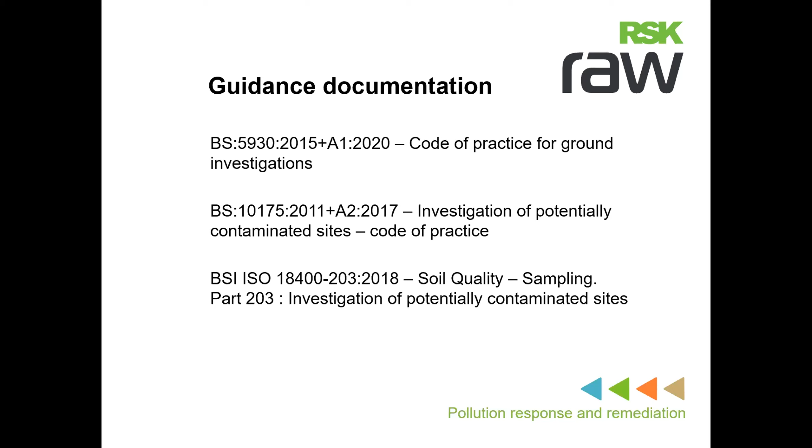So where does it start? Well, it starts at your conceptual site model, the CSM. The conceptual site model is a representation and/or description of the site, incorporating all that is known and anticipated about the site, such as contamination, your geology, pedology, environmental setting. It should identify the pathways by which the current and future receptors could be affected by the contamination. And an important aspect of the conceptual site model is the formation of contamination-related hypotheses.

Gotta love it. Note that its preparation requires some interpretation of the available information and explicit recognition of the uncertainties in that information. The development of a conceptual site model can aid greatly in the understanding of the site and the risks it might present to human and other receptors, as well as the design of future phases of investigation. It also aids in the decision on how investigations and, if required, remediation may be achieved.

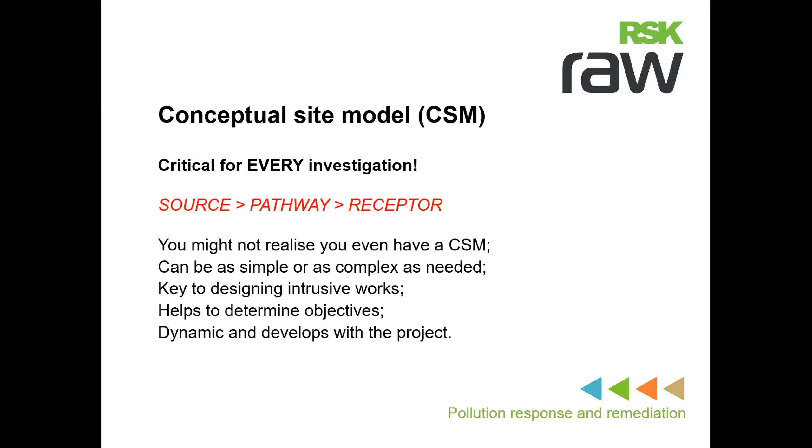Sorry, could everyone mute themselves, please? Yeah, good idea. There's a lot of feedback. Kev Bond. Can we mute Kev? I don't know if I can mute everyone. I think Kev Bond is the one that's giving a little bit of feedback. There we are. Perfect. Thank you.

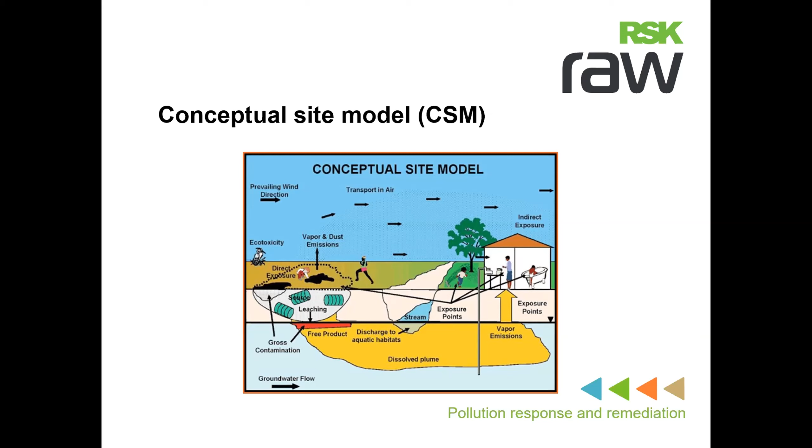Thanks, Kev. So the CSM also allows the contaminated land practitioner to, if required, design a suitable ground investigation, the crux of today's presentation, in order to further assess and/or remediate the identified risks. So, using these CSMs allows you to start designing your drilling investigation by collating the data you've obtained to date and taking other things into consideration, such as the orientation of the spill plume, geology, groundwater depth and flow direction, to name but a few parameters.

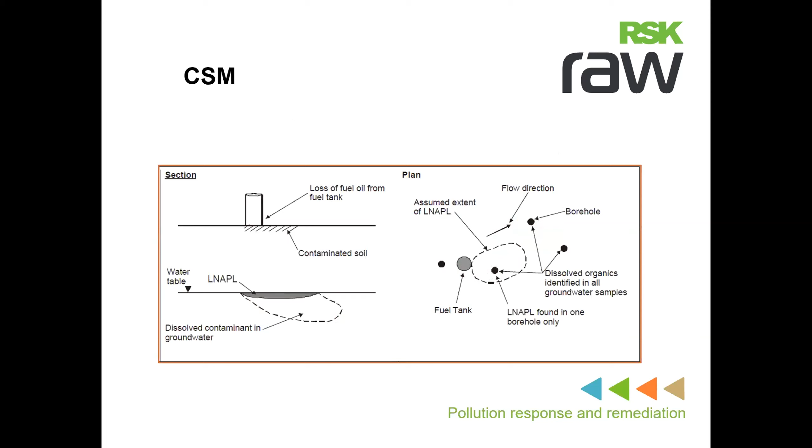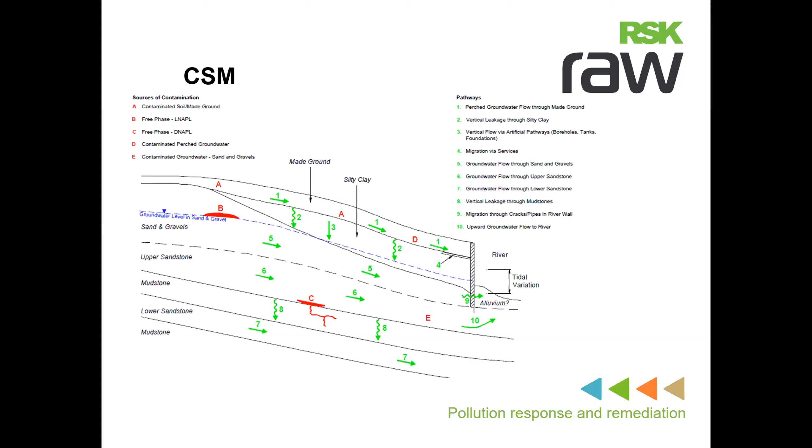So this CSM is from one of my own projects where the ground makeup was particularly complicated. Only through multiple phases of intrusive investigations using different drilling techniques were we able to identify and fully develop this conceptual model. We've identified areas of made ground contamination, 3 different formations, and 2 discrete groundwater bodies. And hopefully this gives you an idea of the amount of information and level of detail that can be obtained by an appropriately designed and implemented drilling investigation. I have to say I'm particularly proud of that one.

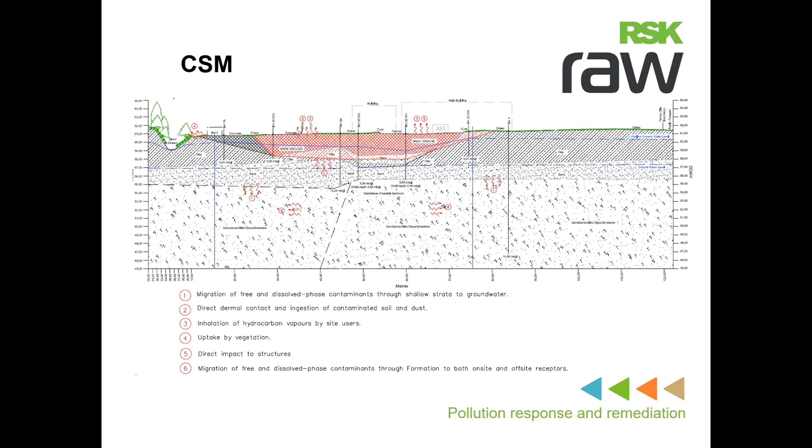So the objectives of your investigations are driven by many factors that need to be assessed on their own merits on each specific project. No one size fits all. One needs to have a clear idea of what you're trying to achieve by undertaking a drilling investigation, and Eric is going to hate me for this, if you even need to undertake one at all. If you need to drill, then you must ensure that by doing so, you're not going to cause a bigger issue than already exists. For example, by drilling a hole to groundwater, are you going to create a pathway by which the contamination, which you're trying to delineate, can then rapidly migrate vertically into that groundwater?

If so, then perhaps it may be better to stop the borehole short of groundwater after bottoming out the contamination in the unsaturated soils, or maybe relocate the borehole outside of the area of your known contamination. If you aren't sure how best to proceed, then please feel free to give me or one of your friendly drilling contractors a call to discuss. The better the planning for a drilling investigation, the less chance there is of a costly mistake being made, and the higher the quality of the data obtained.

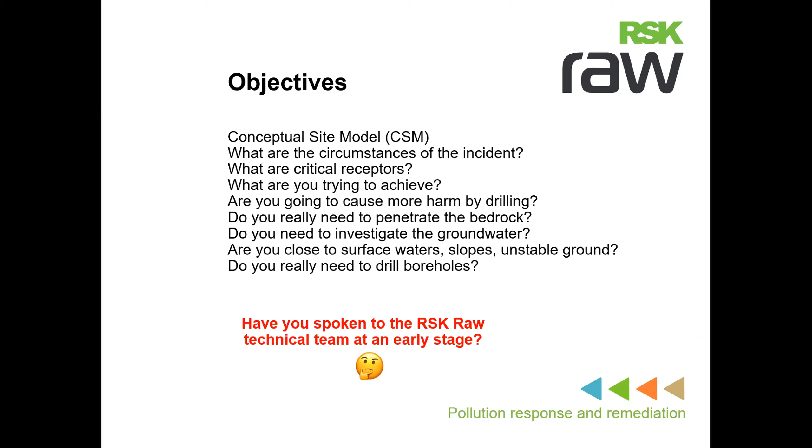So, you decided you need to undertake a drilling investigation. What next? There's lots of considerations that you need to make before you even get to site. You need to determine whether you can safely deploy your selected drilling rig to the site, because wouldn't it be embarrassing to spend all that time and money mobilizing to site only to find that you can't actually get the rig down the side of the building because the access was too narrow and you hadn't measured it?

The following few slides touch on some of the areas that are worth considering and should form part of your pre-start meeting with your preferred drilling contractor in order that you can plan your works properly and safely. When you arrive on site, it's always good to walk the route from where the rig will be dropped off by the transport to where the locations are proposed.

If in doubt about openings, measure them. Simple. If you can find out the dimensions of the specific rig and any equipment, such as compressors that are due to be used on the site, then that can aid in your decision making. But the access limitations you find on site may ultimately determine the final rig used. It's also worth thinking about changes in slope that will cause the rig to tip forward or backwards that could increase the access height required.

For example, the top left-hand photo there, we can see the drilling rig passing through an opening into a building, and the floor level inside the building is lower than the outside level. As it runs in, it tips the rig forward and it brings the mast fairly close up to the overhead lintel. Fortunately, we were prepared for that. It was expected and all planned, and there was no damage caused, but it was still a very close run thing.

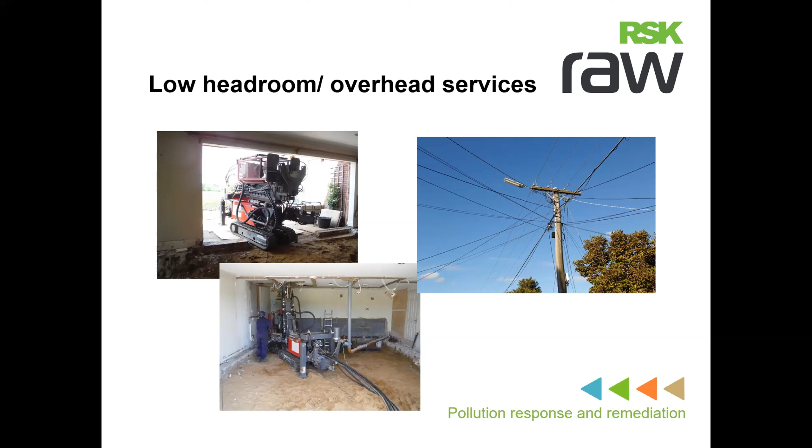Sometimes it's not just the rig you need to consider, it is the lorry that it's delivered on. Is the gateway wide enough? Look at the road leading up to the gateway. Is it a sharp turn into the site, making access more difficult, or a straight shot through? There might be enough room for the rig, but what about the telehandler that is used to move the equipment around?

Is a narrow country lane going to be blocked during the delivery and or operation of the rig and equipment? Do you need a banksman or traffic control measures to ensure the safety of the road users as well as staff and contractors? All things that you should be looking at in your site visit.

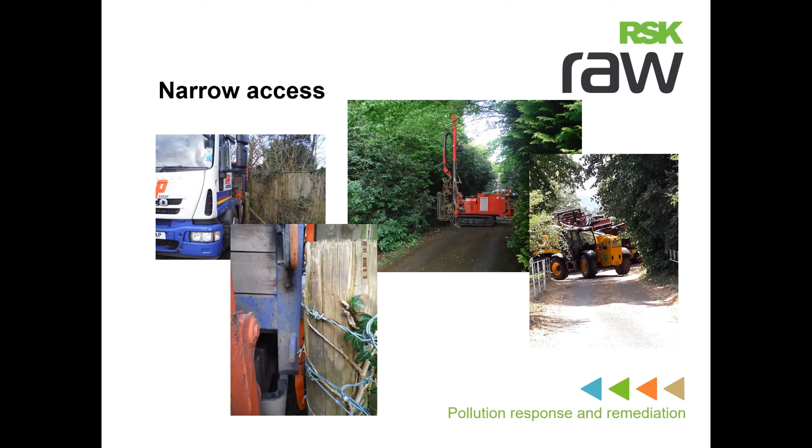Drilling rigs can be very heavy. Despite their tracks, they can cause damage to soft or fragile ground. And bear in mind any changes in the weather, such as rainfall that can turn a grassy field into a bog, or hot weather softening tarmac that can then be more easily damaged. What protection measures can be utilised? Well, there are things such as track mats that you can see in the bottom right image that are very useful, amongst many other solutions.

However, ground protection can be very expensive, both in hire costs and in labour to deploy and recover at the end of the work. So please ensure that you allow enough in your costs for doing so. We quite often see plyboard used for protection, and in my opinion, it's not ideal as it becomes slippery when wet and muddy and can warp, leading to the creation of trip hazards, irrespective of the ecological question mark of its subsequent disposal at the end of the work.

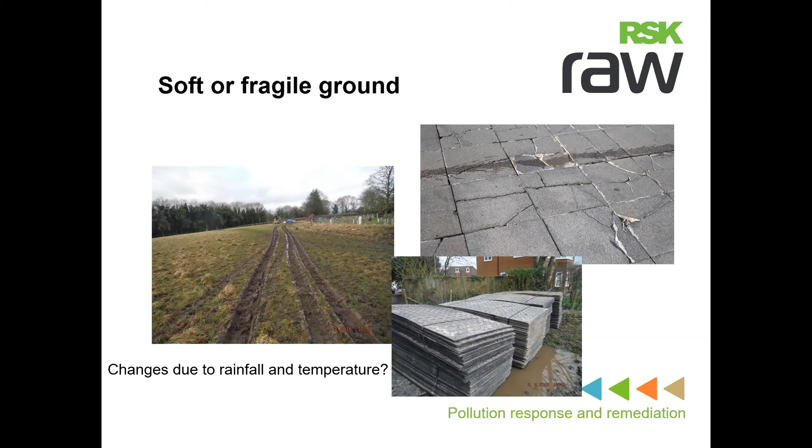You may need to identify an easily accessible and suitable staging area with your client or landowner, maybe somewhere slightly remote from the drilling area. Ensure that the area is fenced and appropriately signed to prevent unauthorized access and allow enough room to work safely. The size of the staging area will be dependent upon many factors, including quantity of installation materials, as you see in the top left, and any additional plant and equipment needed for the work.

Rotary drilling, for example, uses air compressors and water bowsers, as well as various sizes and quantities of containers for storage of and recovery of the flushing fluids. Telehandlers are often used for moving large pieces of drilling equipment around a site, but they need somewhere to be parked safely when not used. Consideration also needs to be given to the location of a skip or stockpile for soil arising.

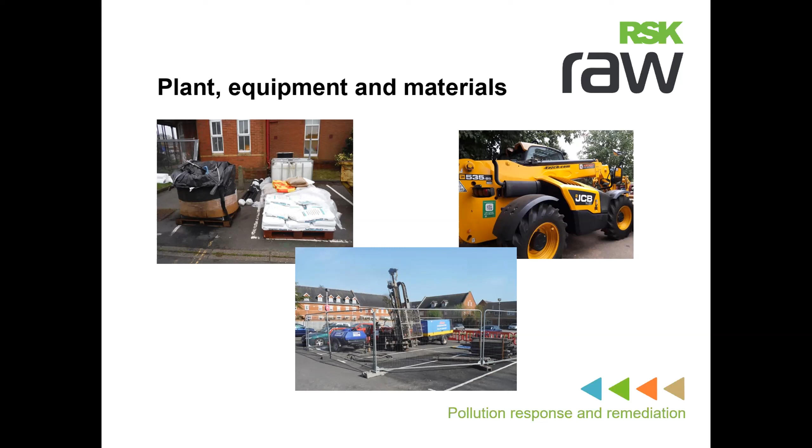I'm sure everyone's familiar with buried services. Allow enough time to order plans from a relevant service provider or use a dedicated service plan provider and clearance contractor. Service strikes are one of the biggest hazards faced during an intrusive investigation. A service strike could be fatal to the operatives and anyone walking nearby, or at the very least, very expensive for the company in repair costs, fines, increased insurance premiums, and bad publicity.

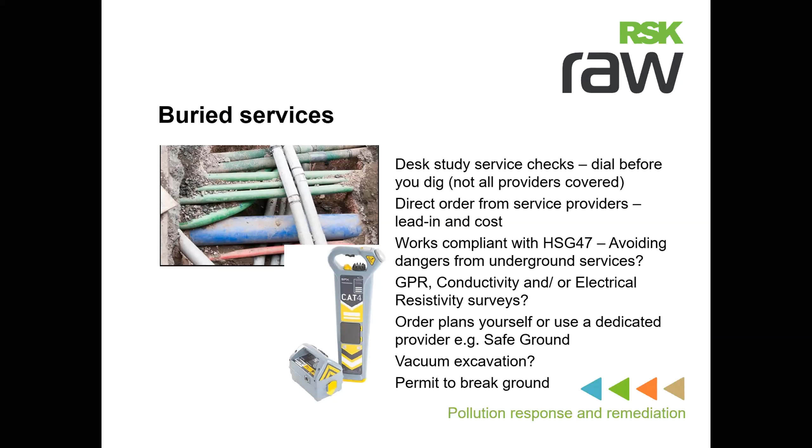Waste is going to be generated during the course of drilling works, and you must consider what to do with it before you arrive on site. As I previously mentioned, a suitable staging area should be agreed for skips or waste drums with adequate fencing, because there is nothing more frustrating than arriving on site to find your skip full of people's sofas and fridge freezers. Waste should be segregated, as usual, into appropriate streams and disposed of via appropriately licensed waste treatment facilities under correct duty of care documentation.

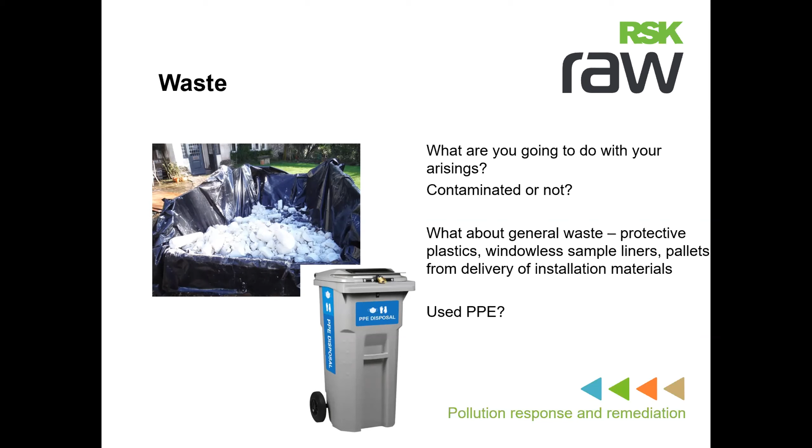Determining the likely conditions will be part of your CSM, and hopefully you have already completed this at desk study stage. If not, you must do this before you even consider putting a rig on site. There are many different sources of information, and you should utilize as many as is required to adequately inform your investigation plans. No one size fits all. At the very least, I would suggest a geology search, a hydrogeology search, and review of publicly available local borehole records, because the information gleaned from these sources will likely have the biggest impact on your proposed drilling works, the type of drilling rig, and the methodology that you use.

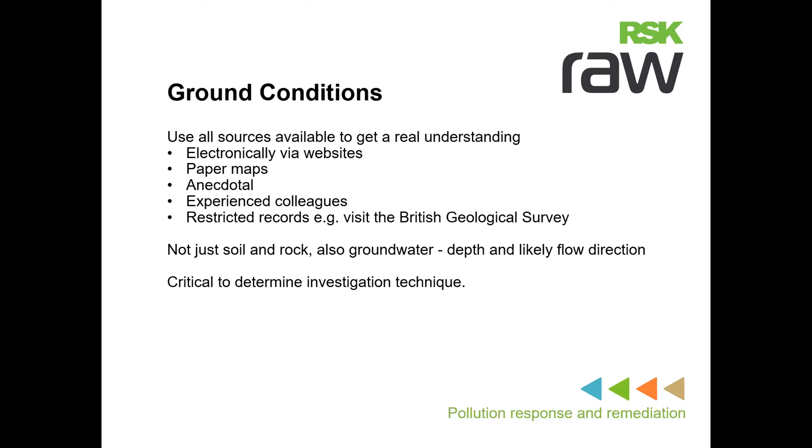Now, drilling rigs. I've grouped them into three main groups, and I'll just touch on them very briefly here. So we've got mini dynamic sampling, cable percussive, which are also known as shell and auger, and rotary or multifunction rigs. And I'll just touch on these briefly over the next few slides, and Eric will discuss them in a bit more detail later.

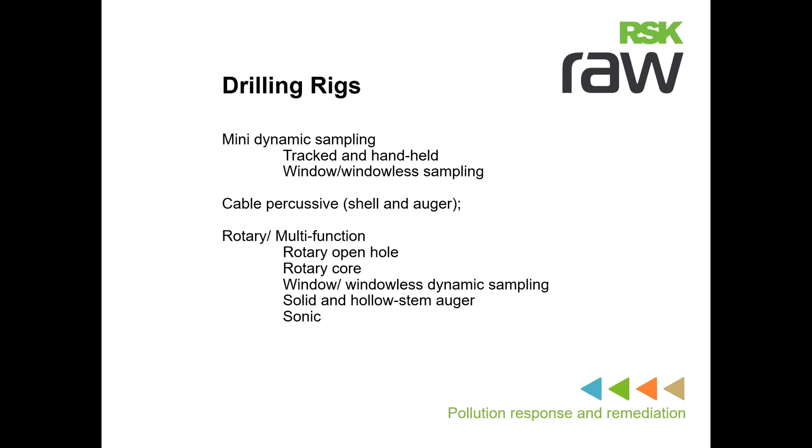Mini dynamic sampling rigs. These can be handheld or tracked and generally undertake window or windowless sampling. There are discrete differences, but I won't go into them here. In the industry, they're generally known as window sampling rigs. They're great for shallow investigations in soils and unconsolidated deposits to depths of about 10 meters, and they're great for soil logging and sampling. They can access relatively restricted areas, including indoors, and are at the cheaper end of the scale for drilling works. They do, however, struggle with consolidated deposits and can be very noisy. The weight that is repetitively dropped in order to drive the sample tube into the ground does drive some people to distraction.

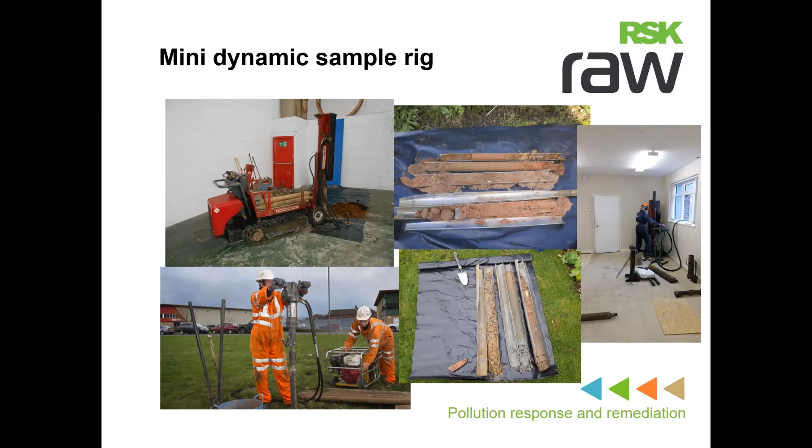Cable percussive, also known as shell and auger. These rigs are usually towed behind a 4x4 and maneuvered into position. They're great for deep investigations of soils and unconsolidated deposits to depths in excess of 30 meters. They're great for soil logging and sampling and are accurate for identifying groundwater strike. They do struggle with rock, but can chisel away slowly, and they do require a reasonable amount of working space.

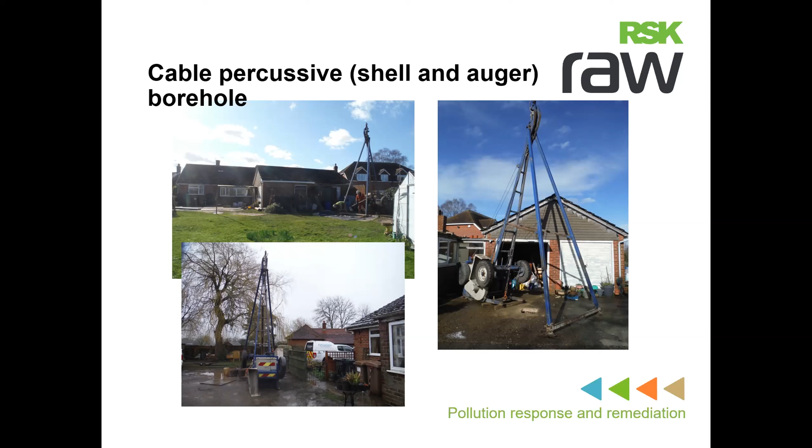So rotary and multifunction rigs are the do-it-all of the drilling world. They're self-propelled, but they are very heavy. They're highly versatile and can often undertake multiple different drilling techniques, quite often on the same borehole. They're great for fast, shallow and deep investigations in soils, unconsolidated deposits, and rock to depths in excess of 100 meters, depending on the rig. They're variable for soil logging, as it depends on the technique being used and the amount and type of arisings that are generated.

Identifying groundwater strike can be difficult, and you need to ensure your desk study information is as robust as possible to aid you in this regard. They do require a reasonable amount of working space, and with your back turned, can create more mess than any child could hope to in the same time. They also have some of the highest mobilization and day rates in the rig sector.

All of the above rigs will create noise, vibration, and dust. Some are worse than others. Adequate risk assessments must always be undertaken, and appropriate PPE and control measures must be implemented.

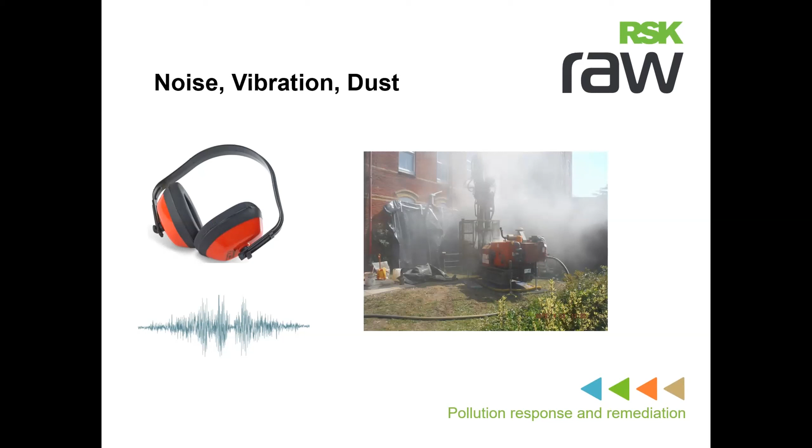Related to the previous slide, dust generation from rotary rigs can be controlled. They utilize different flush mediums to assist and speed up the drilling process, and changing from an air flush to a mist or a water polymer flush can reduce the amount of dust generated. However, they do bring their own challenges.

Flush mediums generally require larger work areas due to the additional equipment required and the potential mess that can be created. Using a flush can mobilize gases or VOCs, create aerosols, and potentially force the contamination that you're investigating into previously uncontaminated strata. Have I mentioned the mess before? Do not underestimate the amount of mess that can be created in an incredibly short period of time if adequate containment measures have not been implemented and/or the flush has not been controlled properly.

Casing. During drilling, usually in the top sections of the borehole, casing can be used to prevent collapse of any loose material back into the recently dug borehole. Casing can also be used to separate different formations and can be sacrificed and left in situ. Casing is a larger diameter than the bore being drilled, is heavy, and on occasion can be incredibly difficult to remove from the ground. However, without it, many boreholes wouldn't even make it past the first couple of meters. Whilst it's a frustration, it's very, very useful.

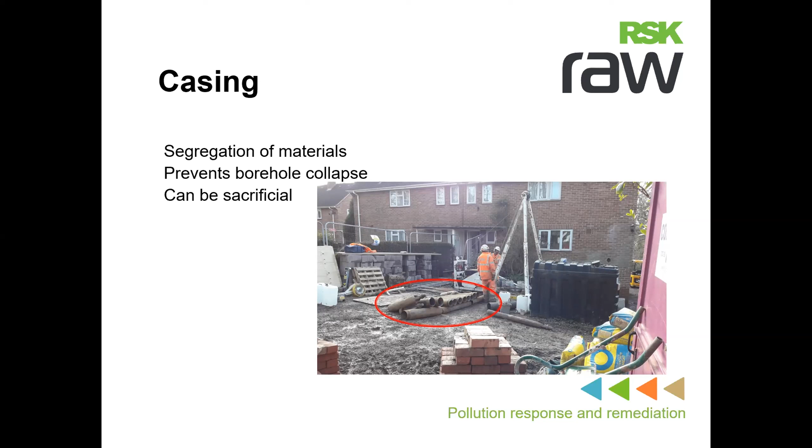On occasion, we need to drill through contaminated materials and into clean substrata or groundwater. And that's where environmental drilling comes into its own. Environmental drilling involves the drilling of a large bore to the initial required depth, i.e. to the base of the contamination. This large diameter bore is then grouted. A small diameter bore is then utilized to drill through the grout and take the borehole to the final required depth.

This methodology is often used when changing drilling technique, passing from one formation to another, particularly with different permeabilities of the formations, or passing from contaminated materials into uncontaminated materials. It is used to prevent cross-contamination between formations and/or groundwater bodies. This is a highly specialized area of drilling and incredibly easy to get wrong. The engineer must have a good understanding of the geology and hydrogeology, as well as the contaminant being investigated, as well as the objectives of the investigation.

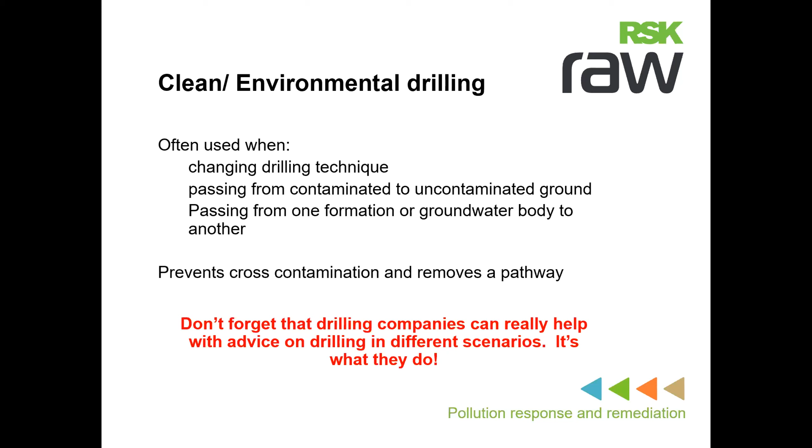So soil logging and sampling. This is a mandatory element of drilling works. You need to gather the data from the arisings in order to provide a record of the ground conditions encountered and to feed that into your CSM and ultimately your risk assessment. Soils, as always, should be logged to BS 5930. And timescales and costs aside, there is no such thing as too many samples. I'm not saying schedule them all for analysis, although some of our labs would be very grateful for that. Log them, headspace them, record them. However, too few samples and you will not be able to complete an adequate assessment of the contamination or risk.

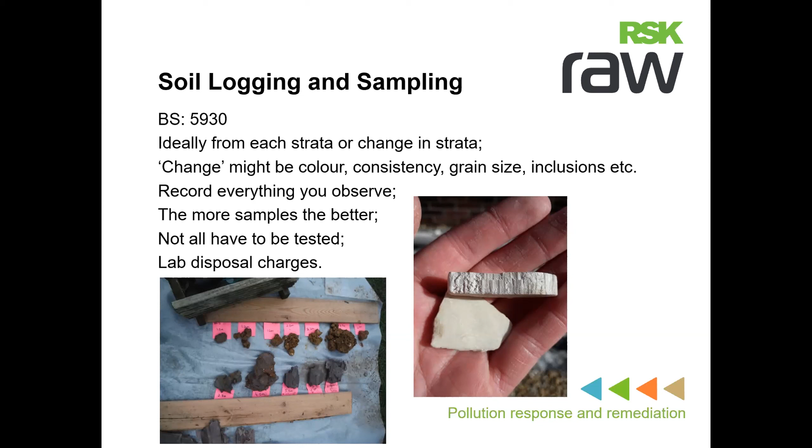Probably the most critical part of the investigation. The design of these installations will be highly dependent on the geology and hydrogeology encountered during the drilling, as well as what you're trying to measure or monitor. What's your objectives? What are you trying to achieve? Does the installation need to be a metal or plastic piezo? Should it be a 50 mil well screen for groundwater monitoring? Oh, sorry. Or 110 mil plus for remediation. Depending on the contamination or the installation details, are welded fittings required by HDPE, or is PVC preferable? Lots and lots of decisions to be made around the installations, notwithstanding the design of them.

The use of a filter sock may be necessary to prevent fine sediments entering the borehole and silting it up, but it may then hamper product recovery and significantly impact validation. I'll repeat it several times through here. There is no one standard installation. It's bespoke to every single location.

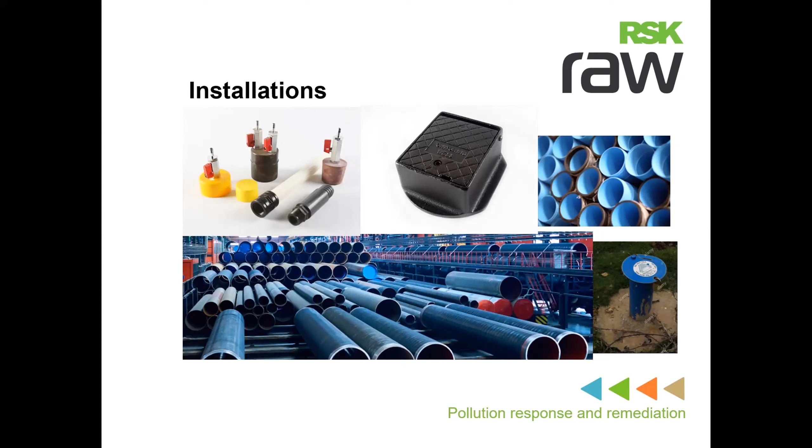Another question to ask is what headworks are required? A flush fit cover to prevent a trip hazard, a raised cover so the well can be found amongst waist-high meadow grass in the middle of the field in the summer, with an inspection chamber within an inspection chamber to aid with the monitoring and remediation equipment. Each option is site specific and consideration should be given to security, so lockable covers if possible, and longevity. As if groundwater remediation and validation is required, these monitoring points will be in place for a number of years.

Upon installation, it is ideal if you can develop the well immediately to remove as much of the drilling fines and flush water as you can to prevent silting up.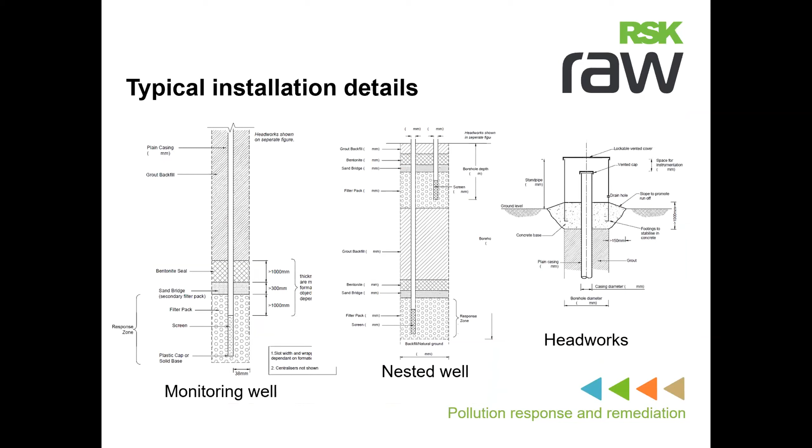So, in summary, never complete a standard installation. Every installation must be site and situation specific. Never link or install a well across strata, as you may create a pathway that could allow rapid migration of contamination into previously uncontaminated strata or groundwater.

If you need assistance, then the Environment Agency have produced a guidance document for the design and installation of monitoring wells. And if you're in any doubt about anything at all, then please ask an experienced contaminated land practitioner or drilling contractor for further advice. I can't stress that enough. Nobody's expected to know everything.

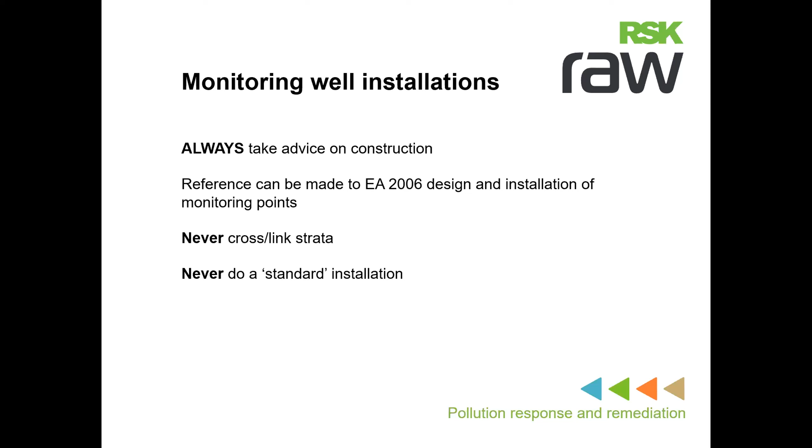So you've got your well in. The well should have been developed. Best practice is also to level in the boreholes or the wells, either to an ordnance datum or to an arbitrary datum for the site. If it's applicable to your investigations and your end objectives, then you can complete a VOC survey of the wells before undertaking your groundwater monitoring.

Always dip and record the depth of LNAPL, to groundwater, to DNAPL and the depth of the base using an interface probe, and always record the measuring point from where you're measuring from. And use that point consistently from visit to visit so that you've got comparable results. You're aiming for representative samples of in situ conditions, and a multi-parameter probe can definitely help with that.

So calculate your purge volumes, usually around 3 well volumes, and then record your purge waters to ensure the accuracy of your purging. Depending on your goals for the work, you may not always need to purge. For example, if you record very high VOCs or free-phase product, that may be sufficient for you to determine there is a risk that further work is required.

There are lots of different sampling equipment and techniques, and the choice will depend on many factors, but particularly the contaminant you're investigating and the recharge rate of the groundwater. Low flow sampling lends itself to most situations as it minimizes the volume of liquids purged that will then subsequently require disposal, and it suffers from minimal loss of VOCs from the sample.

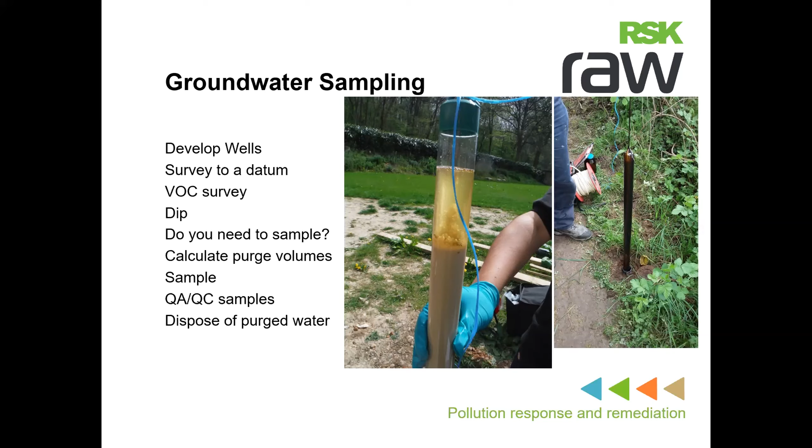So, record keeping of the findings of your drilling works and installation details are incredibly important and will form a very big part of your CSM, risk assessment and your final reports, with the data entered and stored predominantly in these borehole logs. These logs provide a large amount of information in a very small space and allow a really good pictorial cross-section of the geology encountered, installation details of your monitoring well, sampling and screening data that you collected during the course of the work, and any other relevant information you want to add on there.

Borehole logs are often requested by regulators and can also be submitted to the British Geological Survey for public record. So do make sure they're good. By comparing borehole logs from across a site, you can often identify the same or similar formations and strata and delineate the discrete bands of contamination. Some specialist borehole logging programs will also allow you to create a 3D image of the site based on the logs.

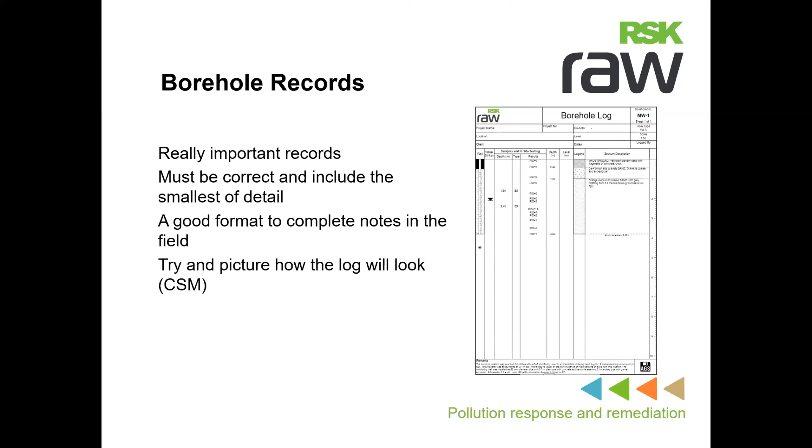So, you've completed your work. You've validated the site. What do you do with the boreholes? If they could be reasonably repurposed for appropriate uses, then that is acceptable. However, improperly abandoned boreholes and wells can provide preferential pathways for groundwater or contaminant movement. This may result in the contamination of groundwater, the mixing of groundwaters of variable quality from different aquifers, or contribute to the loss of aquifer yield and water pressure as the groundwater flows out of the system. This can go on and threaten the availability and quality of the groundwater resources for other users.

Despite seeming a very easy thing to do, the proper decommissioning of a borehole often requires a skill and equipment that only a specialist drilling contractor has. So do talk to your drilling contractors about borehole decommissioning, particularly the emplacement of impermeable materials into the base of the borehole to ensure that there's no bridging of that material as it's in place.

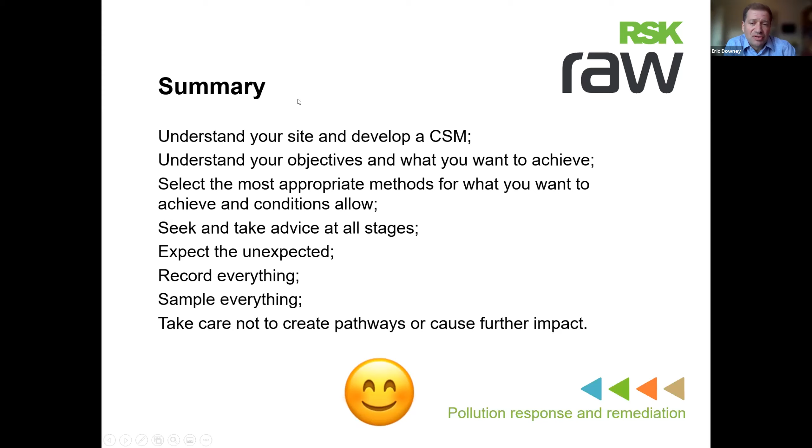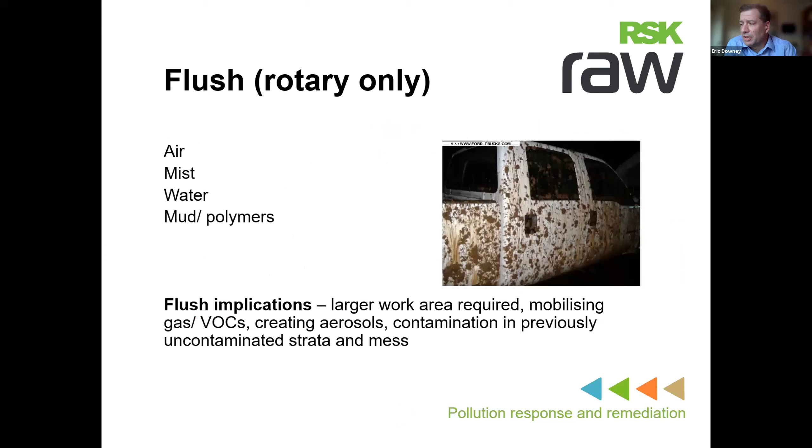That one in particular is a hollow stem auger that was used in very loose, almost blowing sands. As you auger down, the arisings come up the outside. You can log them, but it's quite difficult to know exactly where they're from. That's what I was going to say myself. So I prefer not to. I think I probably had it once on site and it was specified by somebody else, but yeah, it's very hard to get a discrete sample. It's great if you're just putting a hole down, but I would not specify that for any contamination because you don't know quite where that contamination or that material has come from.

So I think no, indeed. They're quite useful for installing boreholes in those kind of loose ground conditions. They essentially self-case as they go. The challenge then is removing the drill string without pulling the well installation up and out with it, particularly with blowing sands.

Yeah. Sam Granger has said, as soon as I hear rotary and car parks, I always pack a few extra large dust sheets to cover over cars. Yes. A very cheap and cheerful thing is some Harris fencing and some visqueen on the back of that. That seems to work quite well, and that's quite effective, certainly. And yeah, chalk is the worst thing ever if you're rotary drilling in a chalk area, because that chalk dust gets everywhere. We do most of our drilling in the southeast, so we come across chalk an awful lot, and it's challenging.

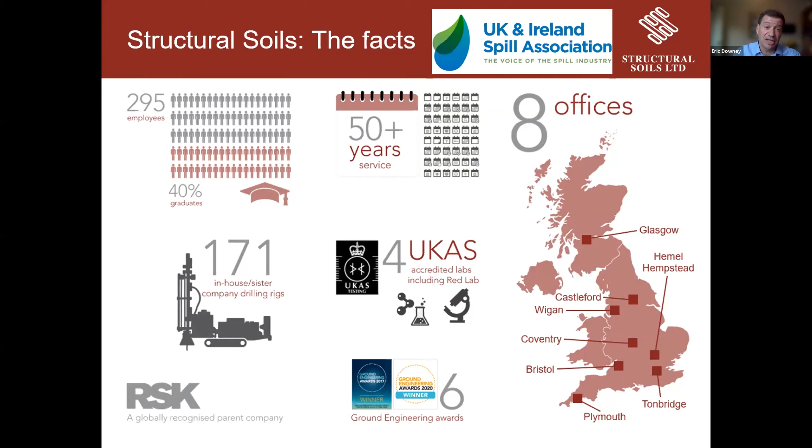I'm just going to very briefly give you this one slide of Structural Soils. We are nationwide. We're part of the RSK group, a bit like RAW, and we have a number of offices, a number of bases of operation, and we have a huge number of rigs within our group. So hopefully we can meet your needs, requirements, and timescales, which is probably more to the point than any of the other above. I won't talk about who we work for, but we do contaminated land. We work for a number of different people.

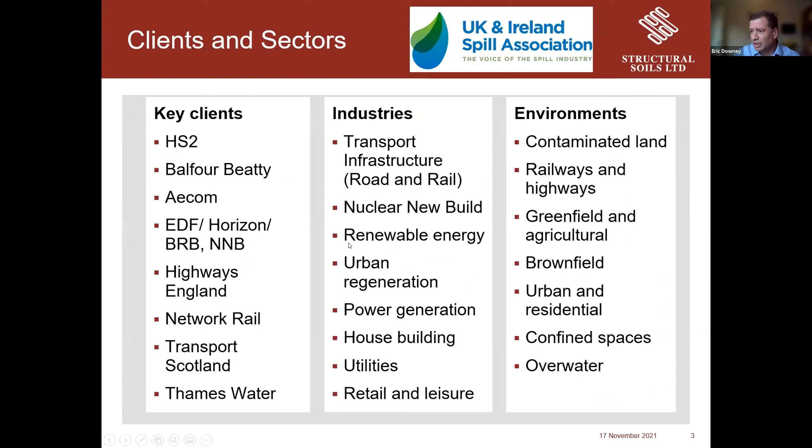So Rory has touched on investigation techniques, and I don't really want to teach you to suck eggs. However, I just want to go into a little bit more detail than Rory gave about the cable percussion drilling. This is typically for soft ground materials, so we're talking sands, gravels, clays. It's been around since Roman times. Obviously, the Romans didn't quite have a petrol or diesel engine on the end, but they put in piles using this sort of A-frame technique. So it's been around a long time.

It's very effective, it can get through a number of different ground conditions, and it's relatively maneuverable. I will talk about some limited access stuff in a second. We can get down to 80 odd meters if you're lucky in the right ground conditions. But yeah, it's very, very effective. And like Rory was saying, depending on your site, you may want to get other rigs in, different types of rigs to give a variety of different techniques on that same site.

But what I do want to talk about very briefly is one of the mandatory safety features. The British Drilling Association has now made it mandatory that all cable percussion rigs have what's known as a whip bar on it. And if any of you come across a driller that's not using the whip bar, you can get his or her respect straight away by saying, please, can you put your whip bar on? And they will know that you know what you're talking about.

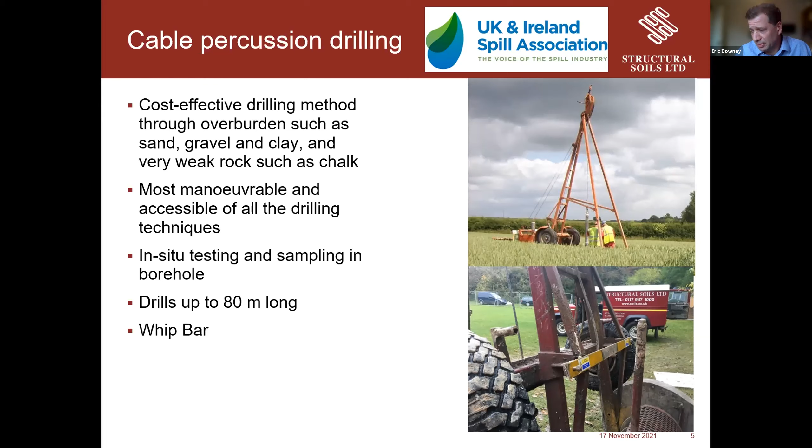So Rory did actually have a picture of a cut down rig in someone's back garden. This is another picture of a cut down rig working in a basement of the old Colston Hall in Bristol, which is now called the Beacon. Yeah, it's all about communication, and Rory did touch on this. It's very important that you talk to your drilling contractor about where you want the borehole, and the limiting factors. And he also said about measuring the height.

The more height we've got, the larger the apex can be, the bigger the rig we can set up, the faster we can drill. The faster we can drill, the faster we're out the way, the cheaper it is for your client or you. So the more space we have, the easier it is for us to drill, the faster we can do the job.

This job on the left-hand side was a job I tendered and project managed, and I asked the client, what's the access like? He told me I want you working on a bridge deck, and it's about 3 meters wide. I said, absolutely fantastic, thank you very much. We came with a full-size rig. However, what I didn't ask was, where exactly do you want that borehole within the bridge deck? I didn't ask the question, and he didn't tell me the answer, but he wanted it off center.

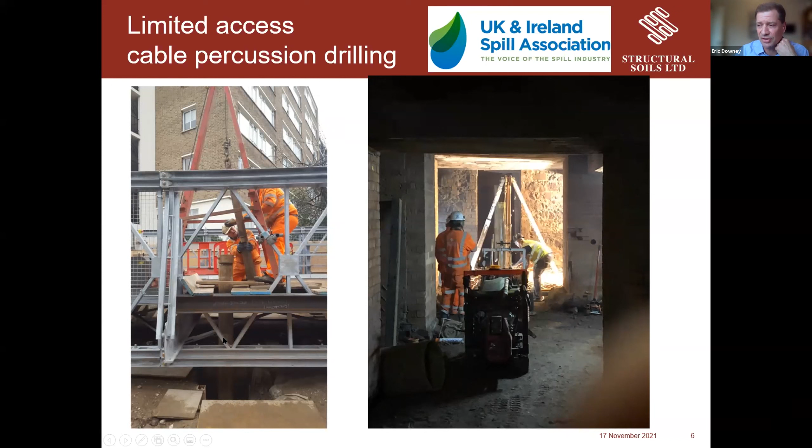So this was a site in London, and we had to mobilize a second rig to make sure that we got into the location that he wanted. So again, communication is vital in all of the things that we do. It was just not asking the right question at the right time. So that cost us money, unfortunately.

This picture is obviously a small rotary rig. It's a Geo 205. It's a fantastic workhorse of the ground investigation industry. Most of our competitors have them. They're relatively small, relatively powerful, and can go into lots of different environments.

One of the benefits of this type of drilling rig, it's got two drilling heads. One is a dynamic sampling hammer, which will just push through the drilling tubes, which are over here. Those are like casing, and you've got the rotary. Well, these aren't the right ones. These are the rotary barrels, but you've got a sort of casing and sort of vessel that will be hit with basically a big hammer, and that will go through sandy clay sands,

but it needs to have a cohesive element to it. And if it's pure sand or pure gravels, it will struggle, and that's when we need our cable percussion rig. But if there is a little bit of a clay content in there, we should be able to use the dynamic sampling head, and then when we've got through what we class as the overburden, the sands, gravels and clays, we can then flip over to the rotary head and then use these rotary core barrels and go through using that.

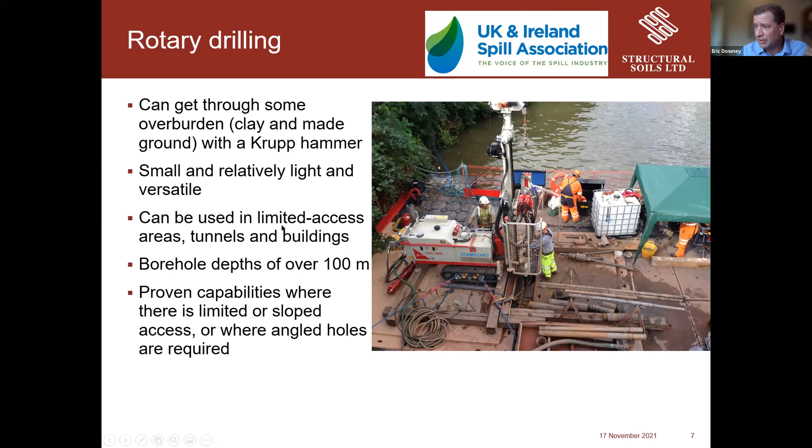So this is one of the SPT hammers, and this will give us strength indication through the site as well. So yeah, that's the small rotary job. We can get a rotary job into some confined spaces.

Again, some of you guys may have spills within buildings. You may need to investigate inside. It depends on how deep the spill has gone and the ground conditions, but we can use rotary inside the buildings. Obviously, you just need to be careful of the fumes. We need to make sure that we look at the fumes and the amount of air that's coming through here. We don't want to pollute the atmosphere.

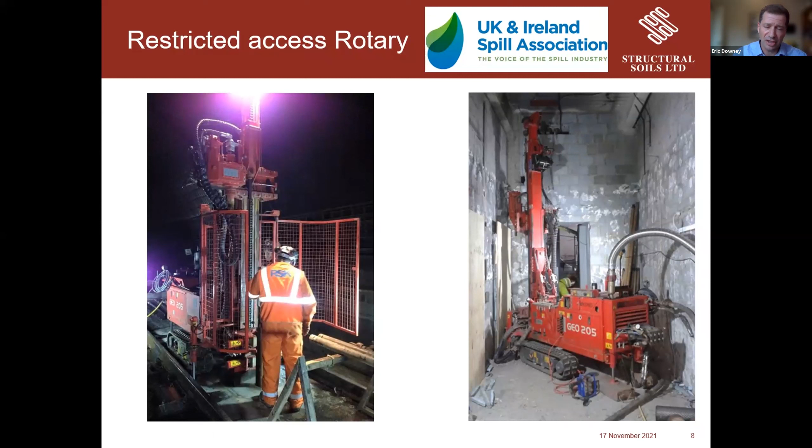This is working inside a tunnel in Glasgow. I had the pleasure of working inside a tunnel over Hogmanay one year. So again, as long as we talk to each other, we can get our rigs or our drilling equipment wherever you like.

Especially with contaminated ground, sonic drilling appears to be one of the better ways of recovering good quality samples of contamination. There is a little bit of disturbance on the edges of the sample of a sonic rig. There are two different types of method of recovery. One is almost like a plastic sausage that comes out, or we can use rigid liner. So these rigs have actually got a rigid liner, so that's quite helpful. Or we could have the sausage element, which is better for sands and gravels, but not so good for clays.

So these are quite unique in the country. We've got 3 of these in our fleet, and they've got a sonic head and a rotary head. So once we're through the dense gravels, we can then flip over onto the rotary. So again, you only need 1 rig to get through 2 different types of strata. So it just saves a little bit on your mobilization cost. However, these sonic rigs are literally the most expensive type of rig you can get on site. So be aware of that.

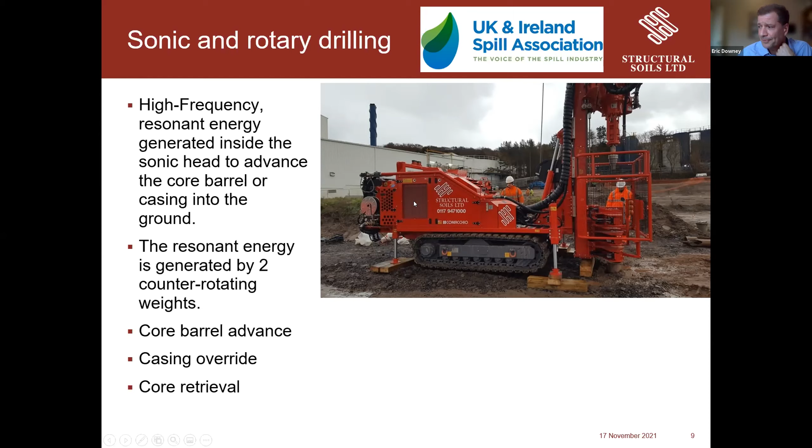Rory was also talking about soft ground conditions. Again, a lot of our sites could be in peat bogs. Hopefully you don't get many spills in there, but I'm just giving people the range of drilling plant that is out there. This has got a rotary rig on the back of it, and it has a PSI of about 2 PSI, so there's a very small pressure on the ground, so we can get into some pretty soft areas.

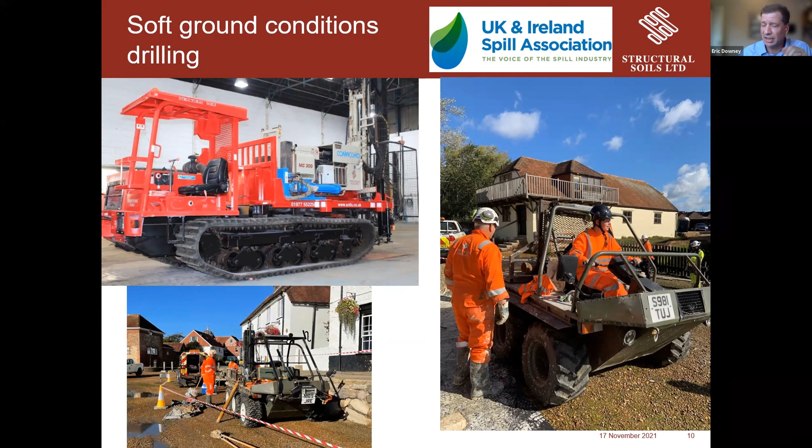We've also got these Supercats, which are pretty awesome bits of kit. This one over here has a window sample rig on the back of it, and I think this one is just a support vehicle for the cable percussion rig. We were working in an intertidal area, and it was very helpful to get in and out, hopefully before the tide came in.

Some of your investigation techniques: you may have a slope issue. There may be some sort of spill on a slope, so we need to investigate that. There are slope climbing rigs, and one of our sister companies called Central Alliance has slope climbing rigs, and they can get on and investigate the side of a slope.

They've actually upgraded this. They've now got a couple of others as well, which have a platform rather than without the platform, as on here. But again, they can work up to about a 45-degree slope. And this one's actually got a cone penetration test head on it, whereas it can also have a rotary head on it.

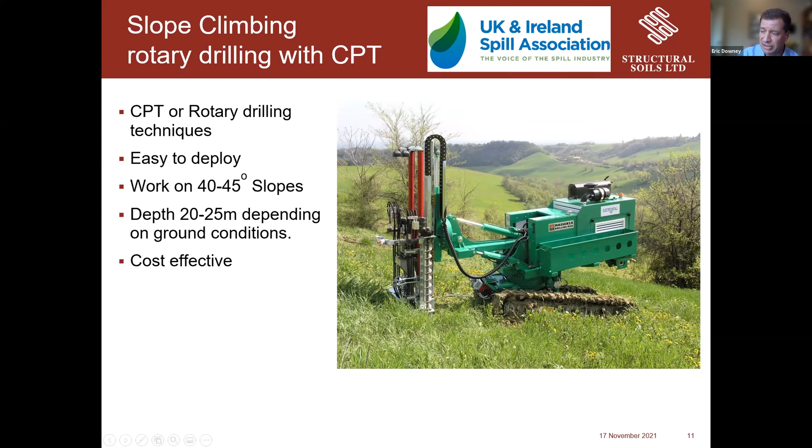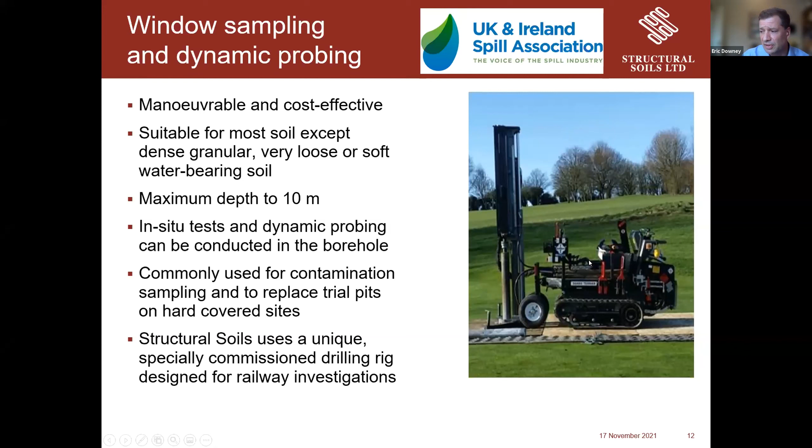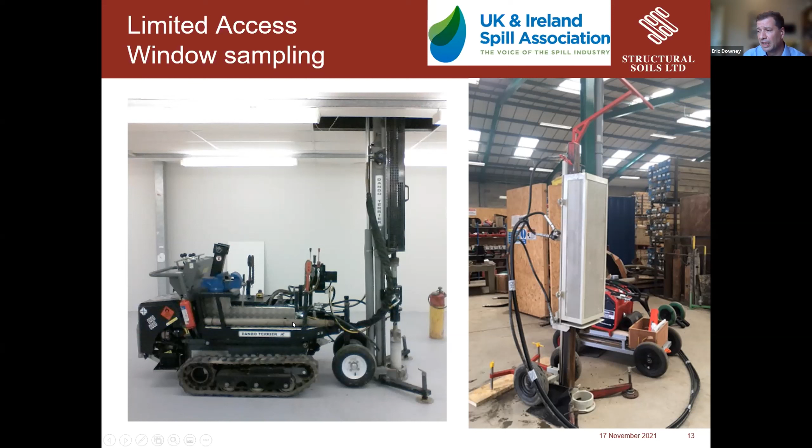So Rory also showed some rigs working inside. We have also got electric rigs. The rigs that he showed were diesel. This one is also a diesel. The mast does come off, so if we have a difficult access site, we can put the power pack outside and work inside, again to keep the fumes safe for us to work in. Yeah, so that's that one.

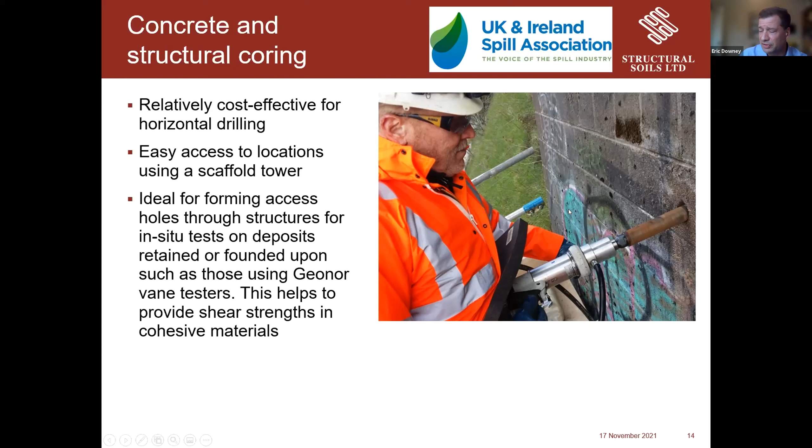Concrete coring. This is a very useful method. It's cheap and very rapid. We've got a small 50 mm barrel here. We can drill it through the floor, so if there is some contamination that's gone underneath the floor slab and we want to check how far that's got, we can use the concrete coring to get through the floor slab. Or this is actually behind the wall, so it's more geotechnical rather than geoenvironmental, but you'll get the idea. And we can then take a sample from behind that as well.

One of the things that we do run into trouble with: the larger the sample size, the more sample we need for our testing. So again, like Rory said, the samples cost very minimal compared to not having enough samples and having to go back again. So please always specify more samples than you actually need, because it's still a hell of a lot cheaper than going back to site.

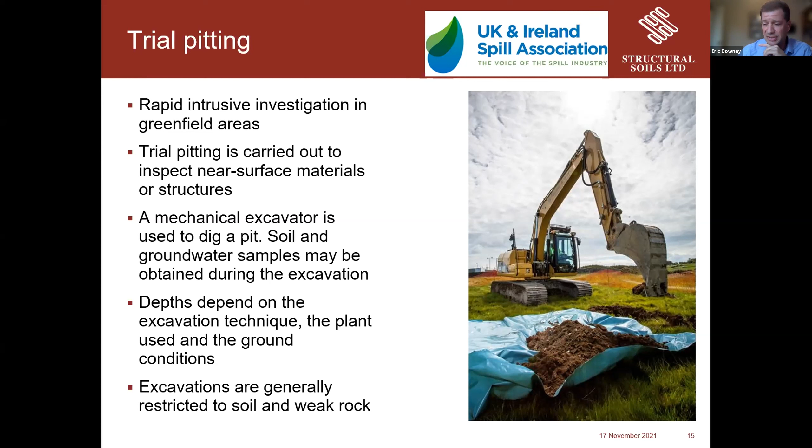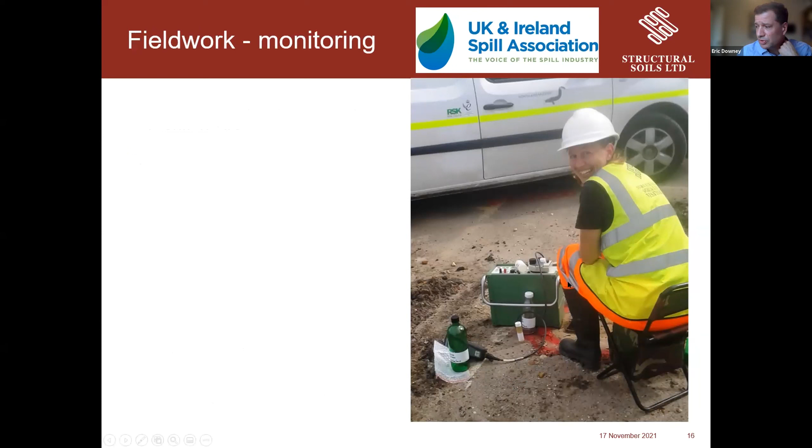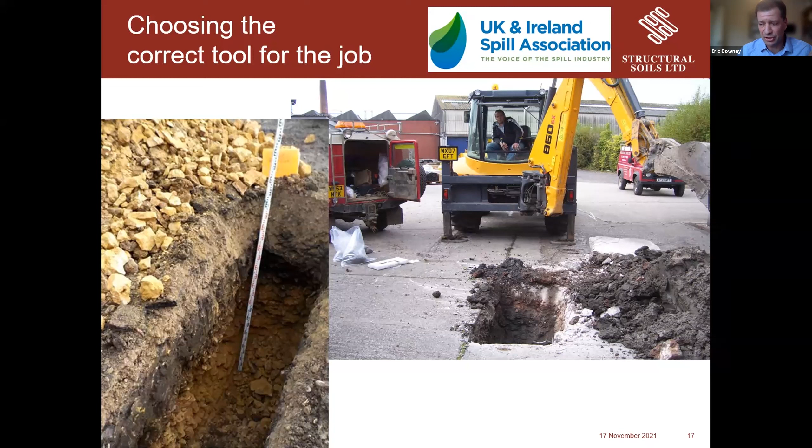If we turned up with a window sample rig over here, we will struggle to get down through this. So again, if you turn up with just a window sample rig without a JCB, you are going to struggle to get through this. So yeah, it's imperative that you plan your work, have a look at the geology map, make sure you don't turn up with the wrong bit of kit.

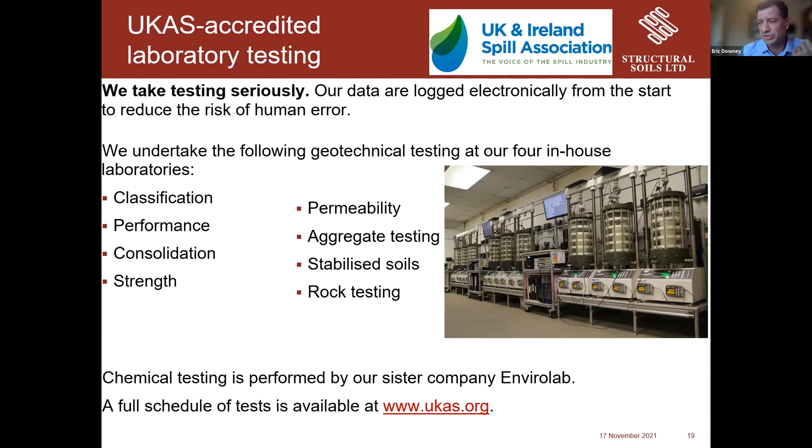So this is more geotechnical, but we have a lot of kit that we can test all of your geotechnical testing for. So I'm not going to spend too long. Any of your contamination material, we've got our sister company Envirolab, which will test any of the geoenvironmental testing that you require.

But what we do have in our Castleford office, which is near Leeds, is a red lab, so we can test any hydrocarbon impacted material, any asbestos impacted material, and do any testing that you require in a safe environment for our team. There is a premium for working in the red lab or having red samples, but it means that your samples can be reused on site rather than taken to a very expensive landfill tip.

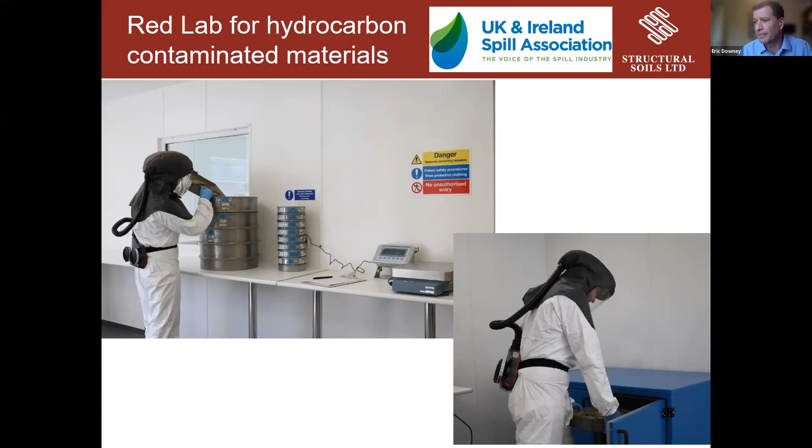So if we can cap it and make it safe on site, as it's already there, and reuse it, then it's so much better than taking it off site. Again, like Rory, we can produce our logs there. We both use the same sort of gINT system, and it can all be exported in AGS. We can give that to your clients or yourselves, and you can do your design from those.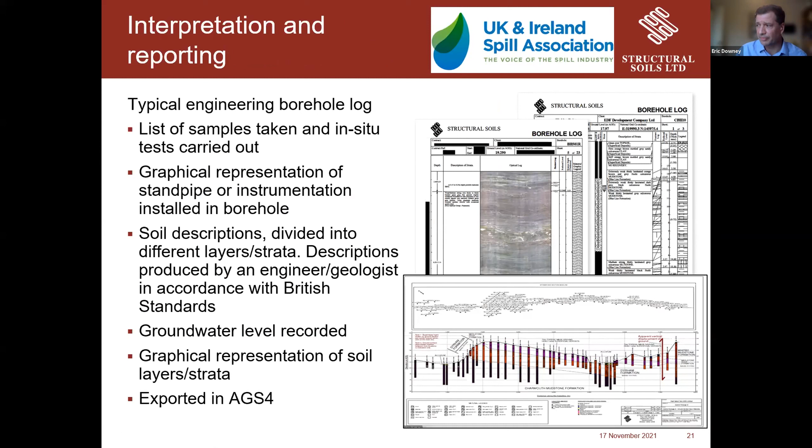So this is my little quick summary. Rory will do his desk study, make sure that we've had a look at all the available information, historic data, produce your CSM. Then part of the mobilization period and the tender period is choosing the right tool for the job, and then we report, and hopefully we do that all in one go.

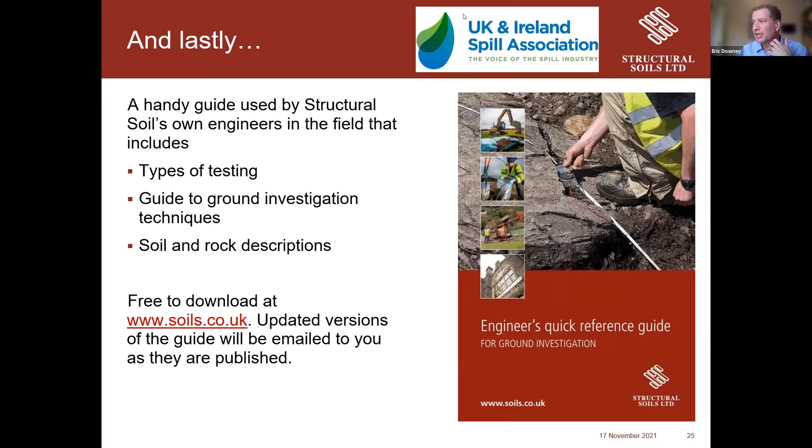Good, Eric, that's great. Do you want to unshare your screen, and I will unshare my screen? Yes. Stop share. Boom. Good. Right. Okay. I'll share mine. So has anybody got any more questions, or are these two guys off the hook? Any questions? I think it's not.